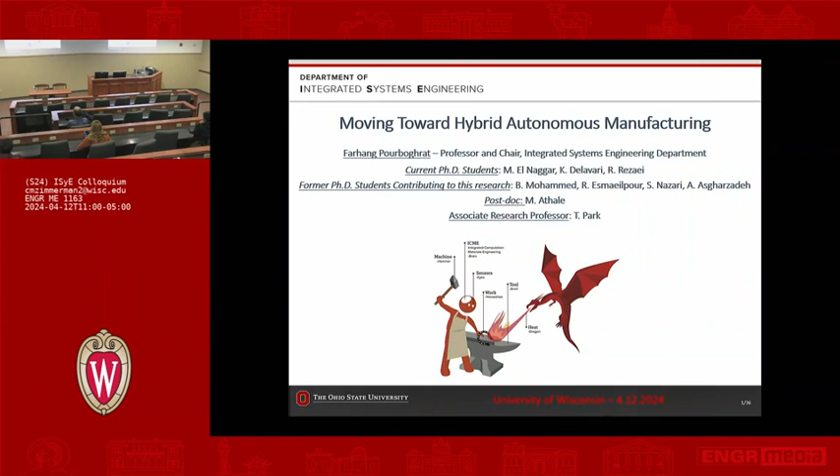The goal was to make something, a sword or maybe a horseshoe, that had certain properties they cared about, and they thought that it had the proper longevity, right? And of course, they don't exist anymore, but at that time, old-time dragons actually existed, just in case you believe that. Anyway, they provided the heat at that time. So I'm going to try to use this to explain what I'm trying to do.

But before I do that, here's the outline of my presentation. As any good department chair will do, I'm going to boast a little bit about our own department and also talk about things that we do. So I'm going to take a few slides to do that. Then I'm going to get into the hybrid autonomous manufacturing process.

But then I'm going to whittle it down to what I do, which is microstructure-based modeling of two types of materials: polymer composites that are used in aerospace and different applications, and also the same thing for metals. And hopefully, if you're interested in materials and mechanics, that part of it might be interesting.

And then I will also explain some of the things that we've done and melded it into a machine learning type of model to be able to then utilize it for being able to actually predict certain things in a very fast and at the same time very accurate way, and then I'm going to try to summarize that.

So let me start with my department first. This is basically demographic data for our faculty members. Very similar to here, very, very similar in many respects. We have also, similar to here, 3 groups of human factor and manufacturing, and also we have operations research. And those are basically the assistant, associate, full professors. Those are tenure track faculty, and also professor emeritus faculty in different areas that are still very highly active in the research and whatnot.

And then we also have clinical faculty; their primary goal is to teach multiple courses, but research is not one of the primary things, and providing service. And then there is also research faculty whose job is not to teach at all, but rather just purely work on research, and they're very active in that and bring their own money, pay their own salary and whatnot. And basically the totals are on the right side. And we have 8 female faculty and 1 Hispanic faculty there.

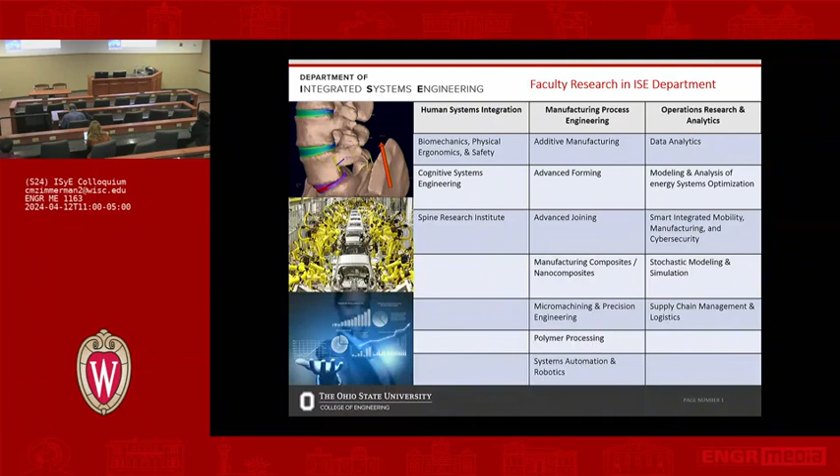In manufacturing, we look at additive, different forming processes, as well as different types of materials: composites, nanocomposites, metals. Joining is another thing. Ohio State is one of the only places that offers a master's degree in joining and things related to that, and automation and robotics. And in OR, data analytics and energy systems are highly emphasized. Cybersecurity is another area where a lot of research is done by our faculty. And stochastic simulation and supply chain is the other area, which I presume is very similar to here in the department in Wisconsin as well.

And there are a multitude of research labs that are very collaborative. For each of those areas, 3 of them are highlighted: the Spine Research Institute in the human factors area, the artificially intelligent manufacturing system, which is very highly collaborative between everyone, and the last one is cybersecurity and smart integrated mobility. So that's a little bit of information about the department where I'm the chair. And so now let's get down to the concept of hybrid autonomous manufacturing. All this stems from a couple of very large center-level funding that we have obtained very recently.

And this particular one is related, it's a 10-year project from National Science Foundation. It's an engineering research center. And the whole idea is to work on the concept of developing hybrid autonomous manufacturing system.

So analogous to that, most of us are very familiar with Tesla, the car company, and Elon Musk. And you could see that from the left side to the right side, it shows the evolution of automation, going from no automation as you move to the right. And I believe maybe Tesla has achieved level 4, but certainly not level 5, not at least in a way that it's safe and it's actually reliable. But you could see the level of automation goes that direction.

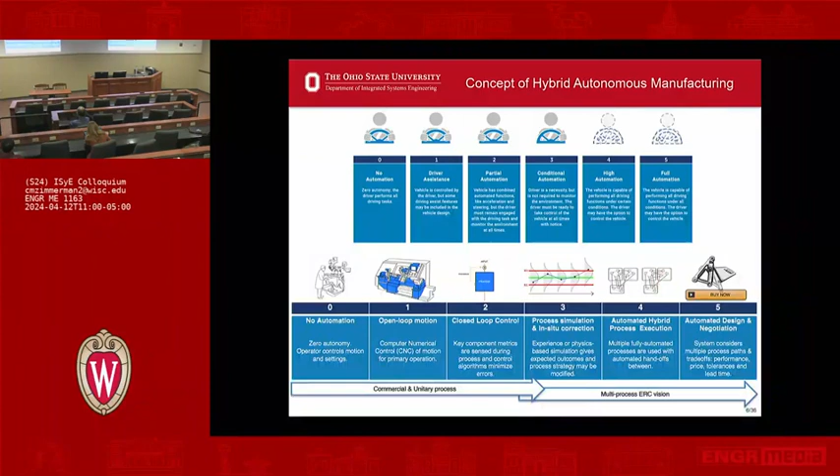So in this autonomous system, there would be a multitude of robot hands that perform different things. It could be additive manufacturing, adding material in certain places, heat treatment, or even forging certain areas, with a lot of different tools it can utilize. And that room will have a multitude of sensors measuring what's going on, and it will try to minimize the error between the stock it starts with and what it's trying to make.

And these are the areas, as I mentioned. It could be in a surgeon's place, when they're replacing something in someone, so it specifically fits their body and their needs. A system like that on the side can automatically make that for them and get it ready during the surgery, or if it is in space where communication is extremely difficult, these systems will be able to do that.

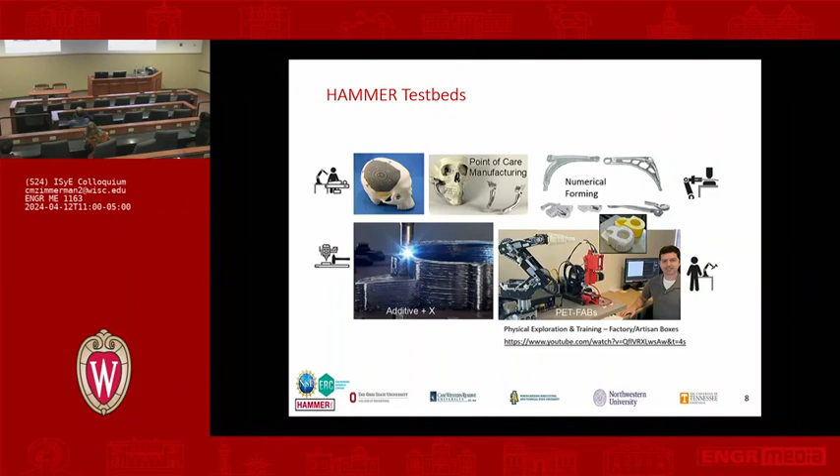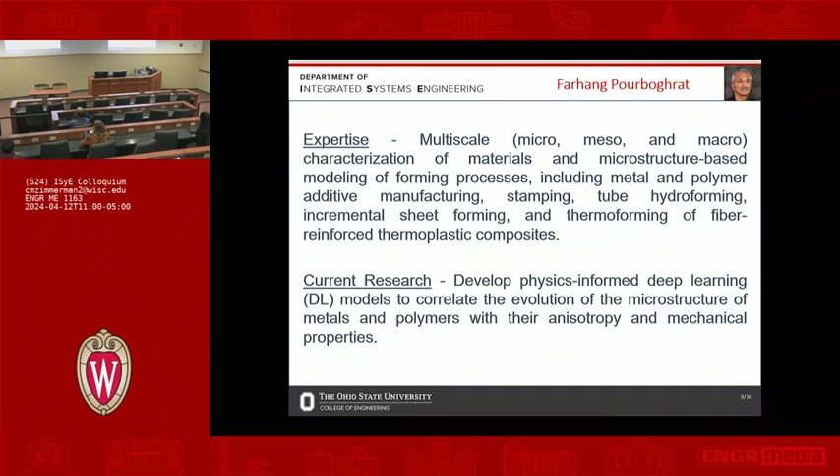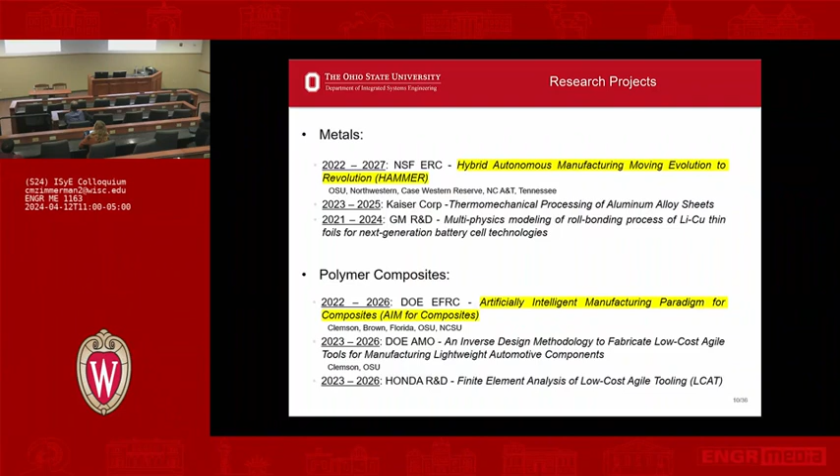Now I'm going to get into, not too much since this was already explained, the type of work that I do. As I said, this is what I'm currently trying to do: develop physics-informed deep learning models that correlate the evolution of the microstructure of metals and polymers to their mechanical performance and their anisotropy. And these are some of the fundings that I'm currently working on. The one on top, as I said, is the NSF ERC. We also have this one, the DOE Energy Frontier Research Center, again related to artificial intelligence, but for composite materials. So let me start with the polymer composite itself.

As you can well imagine, there are many parts in an airplane, from the engine to parts within the fuselage, that require composite materials because they are light, but at the same time their strength is very high with respect to their density and weight. These things are basically made out of laminates, which are many layers of composite polymer materials, but also reinforced in various ways, as I will explain. A multitude of these are put together, and each laminate is made out of plies. More importantly, the ply itself has basic parts: fiber, matrix, and an interface that attaches them together, and that provides what is called a unit cell. If you can work on the unit cell, you can then integrate everything upward to the product itself. This is what my research is about.

So in this project with the composite materials, part of it is called digital life cycle development, and I'm the lead on that. We start from all the basic things, from little resins that go into it and the chemistry of it. What we're interested in is the effect of temperature, pressure, time, and things like that on the resin itself, as well as the fibers that you put in there as reinforcement, and some of their properties. The information that we create is input to making, for example, coupon samples that you can actually test. What comes out of that is information about residual stresses, warpages, and so on, with respect to the volume fraction, void volume fraction, and degree of crystallinity that come from applying temperature and pressure.

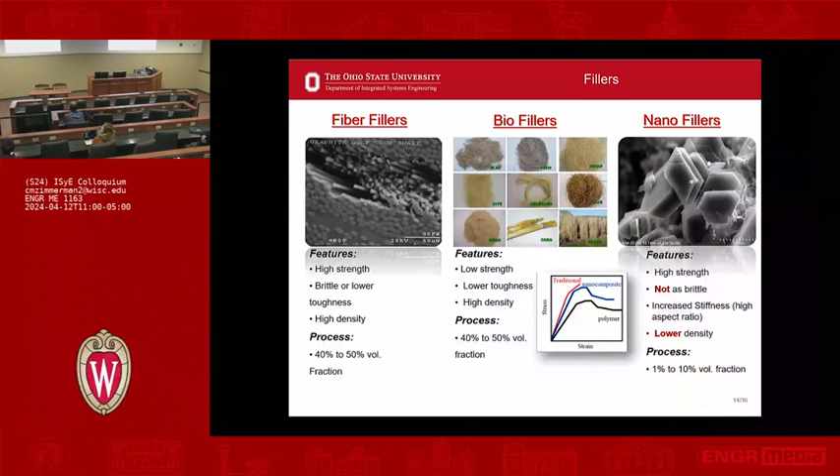These are the things that any model, whether it's machine learning or AI, needs to be able to mitigate, needs to understand, needs to be able to predict in order to decide autonomously which combination to use in order to make a sunglass for you at a given price and whatnot, right? So these are just the little components of everything that needs to be brought together in order to create an autonomous system.

We also look at different types of fabric reinforcement. You can have two-dimensional fabrics that are woven like your clothing that can go into these things, and also three-dimensional knitted materials. And these are all important as part of this project, to have all sorts of data provided to a machine learning model so that it can then pick and choose, because each of them performs differently.

So for example, if you put these things into a model of compression molding or something like that to make a helmet, you want to be able to predict what type of strength it has to mitigate a bullet or dissipate the energy and whatnot. You do not want to make it and then try it. You want to be able to predict these things, and having a good idea of predicting these things requires step-by-step progression of building to that point.

Here's an example of nanocomposites: how do we actually model the data that we collect from an actual part, and how do we create a digital twin of that to be able to create the data so that we don't need experiments. So for example, these are nanographene platelet materials put inside a polymer composite. We use what is called FIB, focused ion beam, to slice this into few-micron-thin slices, and you can see there are layers of it. And if you look at any of these layers, you can actually see these nanographenes going through.

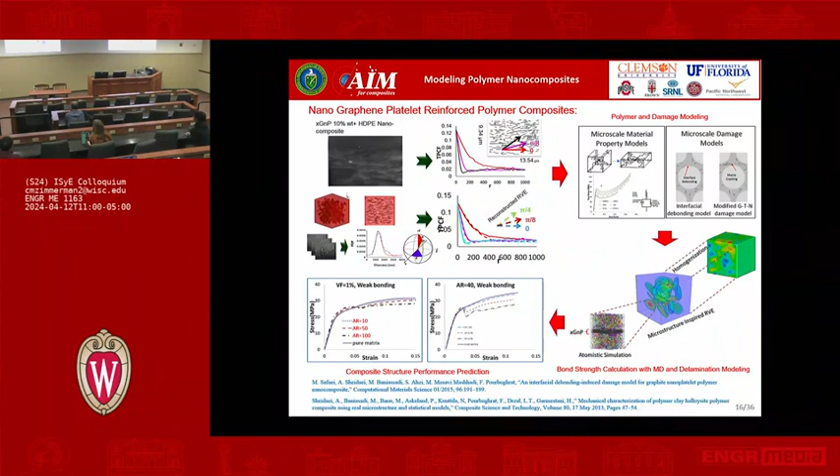And we can do a lot of different types of testing on these, and we can now utilize that even in a machine learning situation. I can take these data and train a machine learning model to be able to utilize it without even running any of these tedious things.

All right, so here's 3D printing.

It makes sense. Why? You look at it, and it's printed, it's nice. You don't see with your eyes that there are holes and porosities in there, but there's a tremendous amount of those things in there that you don't see, and those things affect the properties. How the pattern of laying those things is, how they lay it and build it up, is going to affect it. And again, that's exactly what we do.

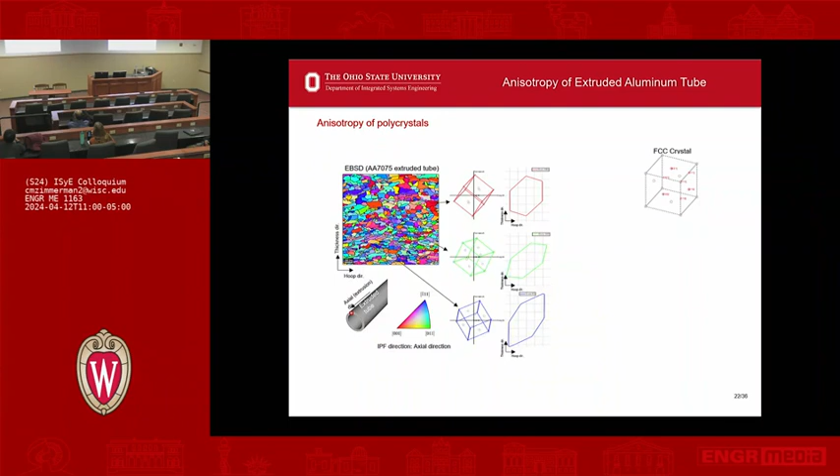Going back to that, let's say this is a tube, and if you measure those clusters in here, it has different colors. Now, each of these colors, with respect to this nice cube back here, has a different orientation. They're the same thing, but they're oriented differently. And the yield surface that I showed in stress space for this red color looks like that. If you go to the green one and blue one, you can see that they're a little bit different just because their orientation is different.

So for this material itself, if I'm interested in knowing its property, you could see that if I look at 5 of these, or 10 of these, homogenized in here, I would get something like that. This material has several thousand, 5,000 of them. If I do 50, or go to 500, more representative of this material, the shape starts to evolve, but it's never going to look like the oval shape it was originally.

And if you go to 5,000, it eventually settles. That last one in stress space represents that particular material. So if you change that, you can get different properties that behave differently. So this is what the capability offers to us.

We work with Sandia National Lab, and they actually took this thing and took measurements on the surface of it in the XY plane, YZ plane and XZ plane. They got all of these with tiny little samples about 7 millimeters or so, very small, and they did very tedious testing on these things.

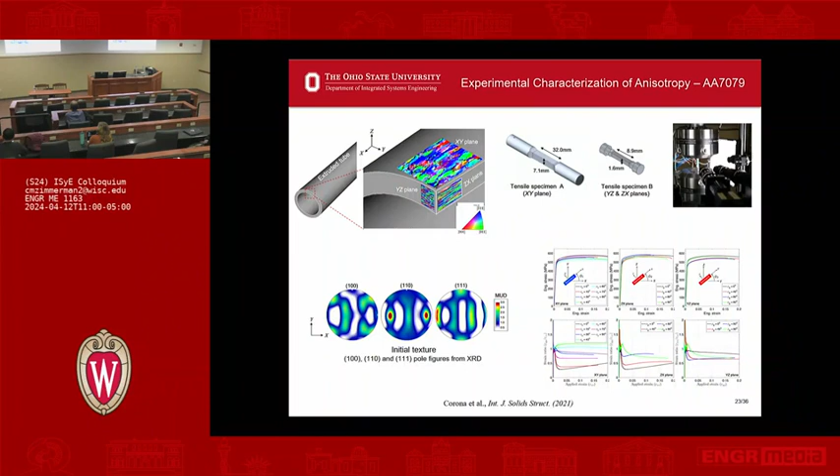They measured these. These are basically those textures that I was talking about, highly anisotropic. What they found out from these tensile tests is that none of these things fall on top of each other, which basically means that this thing is highly anisotropic, not isotropic. And they also measured some other factors called R factors that, again, show they don't fall on top of each other. That means highly anisotropic.

What we did with our model, we actually took those things, and going through that statistic, created one that represents exactly the same material as that tube. We tested it. Here's the actual measurement. This is what we actually created from here. And it actually did a pretty good comparison. So again, this is important because it allows us to be able to trust our model.

Even in that, we realized that, for example, here the trend is not correct. That told us something with this model is not enough, that something needs to be done. And we realized that they only measured these things basically afterward. This is a tube that was extruded. They just said this is what it looks like. But the tube itself went through a process to get to that point. That created certain deformation in it, residual stresses that we did not account for.

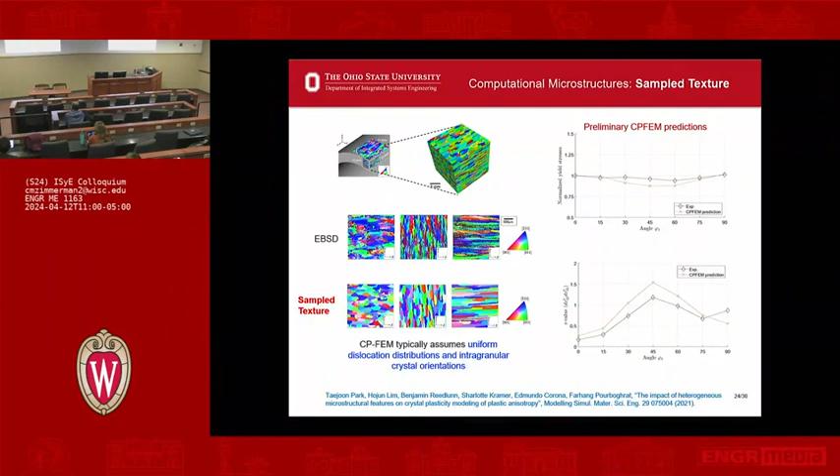So what we did, we created an optimization model of this. We said any material before it became a tube must have been completely isotropic. They measured this thing at the end when it was already a tube. They didn't know anything in between. But we understood what an extruding process is, so we created an optimization process: if it starts from here, what parameters of deformation must it have gone through in order to get the final one, which is here. So we did an iterative process to figure out the parameters of deformation. Once we did, this gave us the residual stresses.

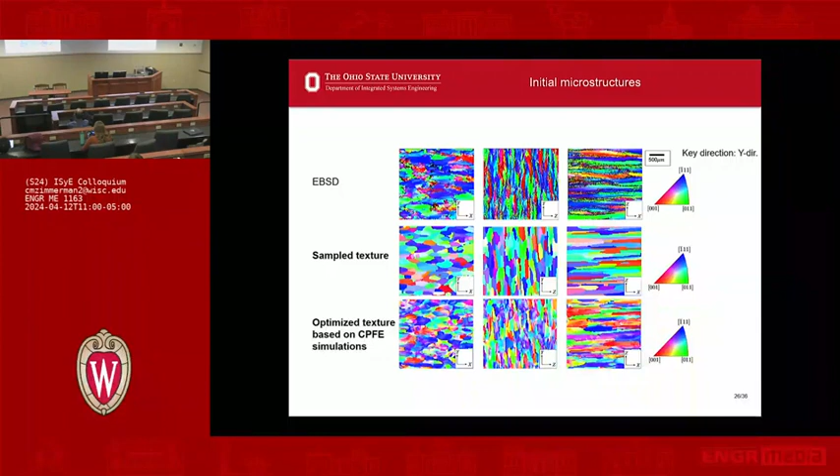We then created another model, which we call the optimized model. So this is the original one, the EBSD, the original experiment. This is the sample without that. This is when we actually put those residuals into it. It starts to become a lot more like that. And then when we use this model, it actually predicted things. This is a sample texture just to optimize. We could see that it actually corrected even that error. All of these models are bringing you more and more into trusting the data that you can actually create.

We actually developed another model even faster than that. I'm not going to get into details of it, but this is what actually did the job for us, because it was basically a model that is 1,000 times faster, without taking advantage of certain deformation, but still looking at all the microstructure. And this was very good for us because it allowed us to do the next thing, which is developing a deep learning neural net for that.

But before doing that, we also looked at, for example, the whole thing: you start from anything, and then it goes through a manufacturing process, here tube hydroforming. It goes through some heating and cooling and all of that, it changes properties, and then we can recreate new RVEs that we can test and be able to tell what that process does to it at the very end.

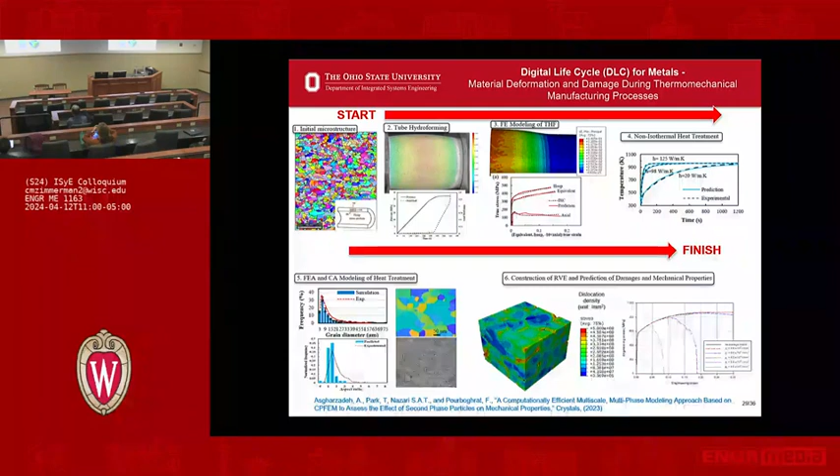In fact, we generated 75,000 data points of these orientations. And then we ran our model with those initial textures to see what would come at the end. What we got is about 4 million data points. And instead of maybe a year or more, which it would have taken us, we did this within a few days.

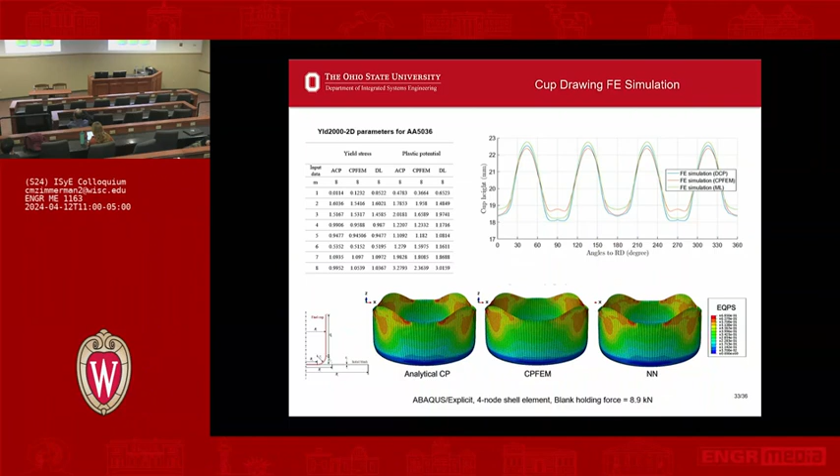Now, what does that all translate to? Very simply put, we even did some simulation of this thing with a neural net model or with a very extensive physics base and even with the fast one. And in every sense, it actually captured it very well. But the important thing is we worked with our colleagues at Sandia. They created a website that people can literally just give the texture that they measure, one texture, whatever it is.

They provide that texture as a file, and they specify whether this is FCC or BCC, like aluminum or steel or whatever. And they also ask which type of parameters you need for your macro level model, which parameters for which model you want. You specify that, you put your information there, your texture, and on an instantaneous basis it will give you what the properties will be, what the distribution would be, and even the parameters pop right out. And if you're a mechanical engineer, you put these parameters into your model, and literally you can then proceed.

This procedure would have taken maybe a couple of years to do experimentally. Now you could do it in the blink of an eye. So let me finish my talk by simply saying, in this domain of work, materials are needed, obviously, to make anything. If you rely too much on physical experimentation, it's expensive, time-consuming, very accurate though, because you're actually literally doing it, but the speed is terrible.

If you use the type of high-fidelity model that I talked about, accuracy is still very good, but it takes forever. If you use simple commercial codes and assume everything is homogeneous or whatever, high speed, but accuracy very low. But the type of things that we developed that eventually lend itself to machine learning has both the accuracy and the speed, and therefore it's a step toward that autonomous thing that we want, to actually have a copious amount of data that it can select from and know the relationship between these things.

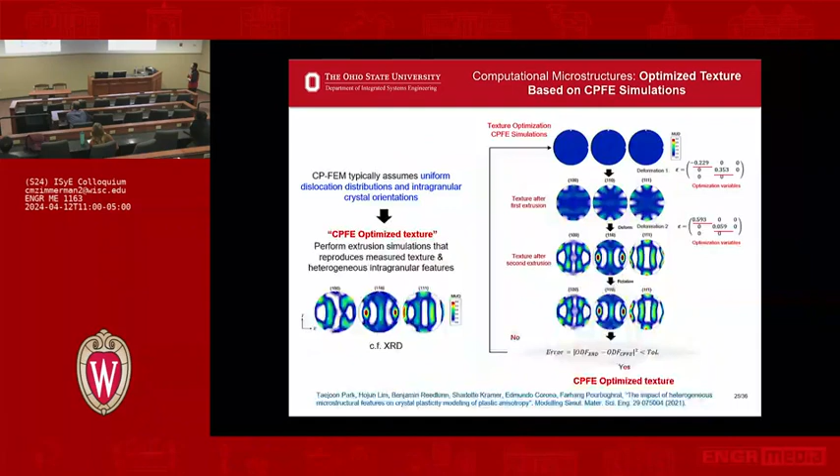Going back a little bit to composites, but first, for this one, it's atomic structure. If you use FCC, like aluminum and copper, or BCC, which is steel of different kinds, once we develop this application at Sandia, you just need to tell us this is FCC or BCC, and it applies to all of them.

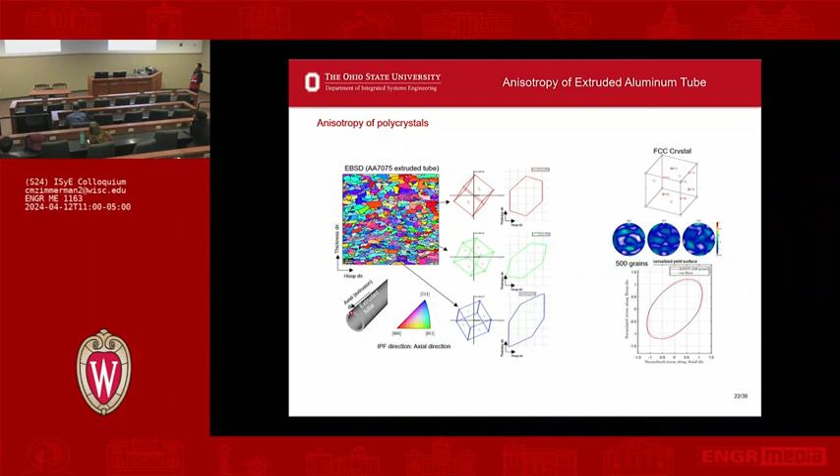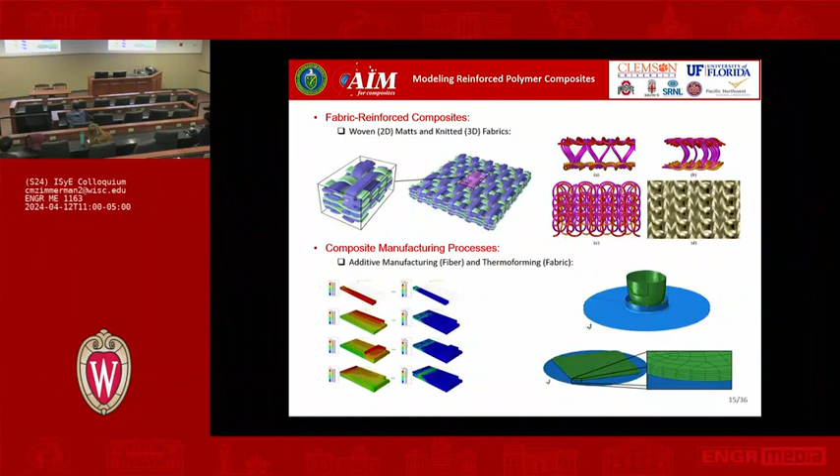Now, let me go back to composites. In the composite part, what we're interested in is really down here. I don't care about the ply or the constituents: fiber, some reinforcement, some resin, and some interaction. This is the unit cell, the lowest level you can get. I use the same thing whether it is forming of layers or the same material model. It's the same basic interaction between a matrix and some reinforcement, or a different phase like a void. So this is general enough.

Even if I go to the next one, here you could see the same void could be from 3D printing, but if the void is known, this RVE could be for a fiber, or for something printed by this process. So it's almost irrespective of that. We go to the most basic material aspect and assume the same things apply, whether it's 3D printing or fiber reinforced stamping. I don't know if that answers your question.

So that's why it's more fundamental, not worried about it being only for this. Certain aspects, like this void, are maybe only for a certain type of printing. But I can change the characteristics in this model without running any more experiments. If I know from CT this void approximately is this, or the volume fraction is something, I can make another one that statistically fits it, and say the property of that part 3D printed in a different pattern will be this.

That's a great answer. And the other question I have is related to a kind of real-time concept for autonomous-based manufacturing. How to make everything to be in real time would be critical. How do you define real time in all of that? None of these are real time, obviously, and that was my point. These are very time-consuming models to run. This is just giving us enough confidence in the model being fundamental.

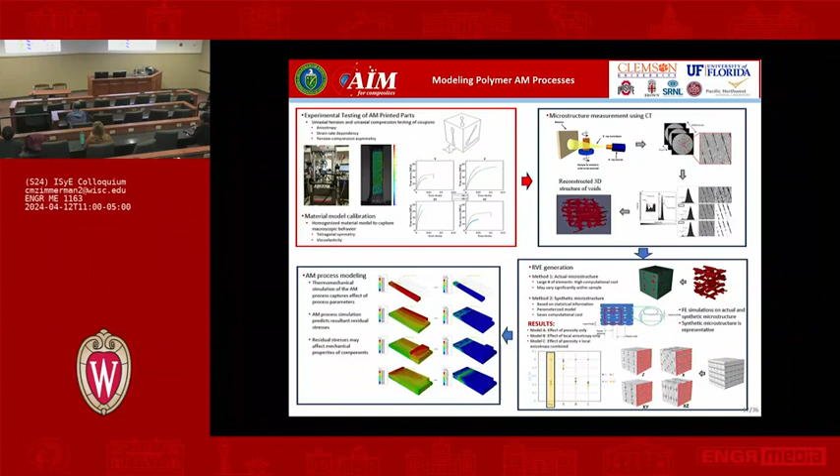Now we use this thing to generate many, many data that needs to be then captured by a machine learning model, some regression, something like that, that captures those things. Now we don't need to run it anymore. So this part, whatever we generate, this data is an input to this VAE type of model that gives correlation between whatever resin I put in there and pressure and whatever. These things are coming from up here, right? We put it now in here as an input-output relationship.

Also for manufacturing, we can create a VAE. Now that you have this correlation, it's a fast-running type of thing, then it could go even into an inverse model of saying, I want this with this type of performance. Can we solve the inverse problem of this, knowing these correlations?

So of course, we had a discussion. If it is very simple processes, linear processes, it works very well maybe. But if you go into situations that are very highly nonlinear, or the material has some sort of a muscle memory, it is path dependent, these simple VAEs might not quite work. It might need some advanced way of bringing that PDE, or physics, back into it, to bring nonlinearities into this type of predictability. But ultimately, this is too time consuming. We need to then create data from there to the next one.

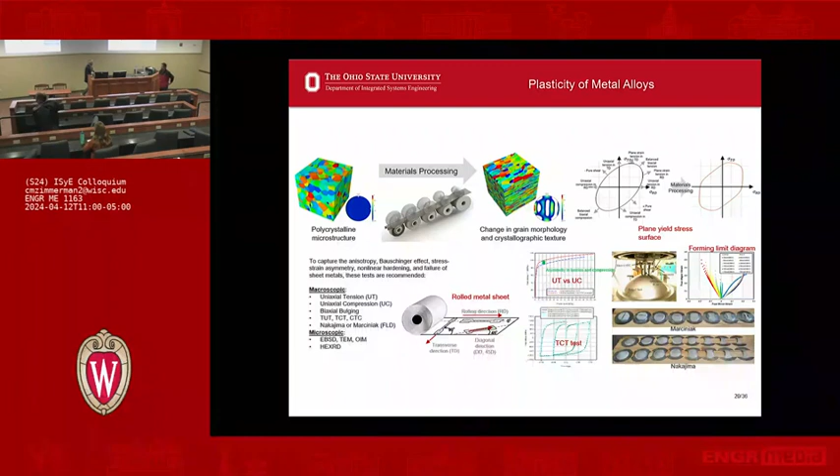All right. Well, hopefully it wasn't too boring. No, I saw my students here. We are trying to tackle the real-time challenge. Right. I think that part really ultimately comes to developing machine learning.

You're just creating data that is not possible to do experimentally, too expensive, and as I mentioned, you make one little change in the process, you have to repeat these macro level tests. But if you have this kind of physics-based model, once you develop it fundamentally from a very basic level, then you can change those things in there. You don't need to go and run the experiment. So therefore, you can generate copious amounts of data, and then that's it.

As I showed, we looked at 75,000 data we generated. It covers all the different types of material. I don't need to go and do it one by one. Once we generated enough data, it went into that neural net, and now they just say, in that website, here's what I have. This is the texture. Boom. It gives you everything after that. You don't even need to go and do anything. So that's where the thing is, I guess.

So let me. There's so many icons on your desktop. I thought my desktop was messed up. My decoration? No, I wish it was. Unfortunately, each one of those things is something that I know where they are, at least. This is an old computer. That's why I had a little problem getting it going. Sometimes it's like, leave me alone, let me retire. I can take your luggage back to my office. I appreciate that. Thank you.